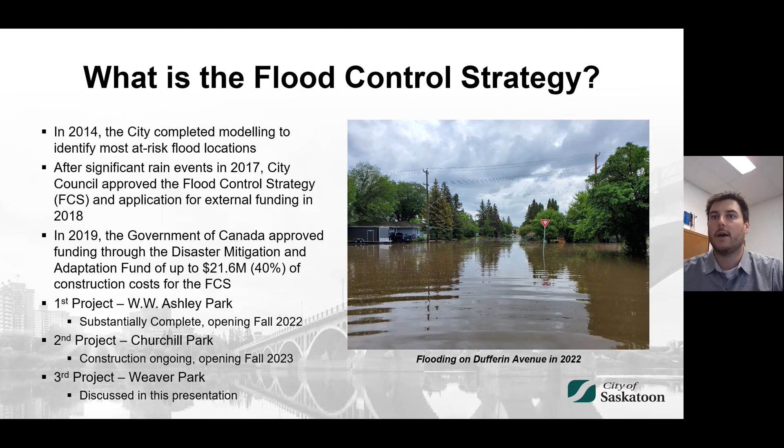Flooding in the Avalon neighborhood has been occurring for decades. The main reason for flooding in the area is due to the design standards that were in place at the time of neighborhood development, causing capacity issues of the storm sewer.

Design standards were changed in 1989, accounting for increased levels of runoff to be drained through the storm sewer infrastructure network. Neighborhoods are now developed with major system stormwater storage through wet and dry ponds, which were not used for stormwater management when this neighborhood was developed.

Administration presented the feasibility study and concept plan of the dry storm pond and upgraded stormwater infrastructure for Weaver Park to the City Council in April of 2022. The dry storm pond project was approved by Council and will help mitigate flooding for the previously mentioned intersections.

This is the current design concept plan for the dry pond in Weaver Park. The dry pond will be constructed on the north side of Weaver Park. The light green lines show the new storm sewer infrastructure that will be constructed along the east side of the park from Ruth Street East to the southeast corner of the dry pond, and also from the northwest corner of the pond to Eastlake Avenue.

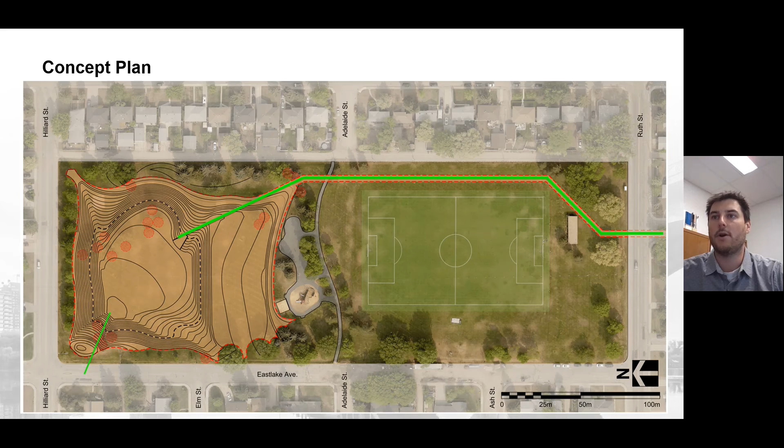The construction schedule will be finalized once the project contract has been tendered and awarded in the winter of 2022-2023. The project will be completed in 4 general phases.

The first phase will be pond excavation. The next phase will be storm sewer infrastructure construction and rear lane paving. The third phase will be landscape construction, and the final phase will be landscape maintenance.

The work zones for the project will include the north side of Weaver Park, which will be the site of the new dry pond. Additionally, storm sewer infrastructure upgrades will be constructed along segments of Cascade Street, Dufferin Avenue, Bute Street, Royal Avenue, and the south side of Weaver Park, connecting the intersections of Cascade Street and Dufferin Ave and Bute Street and Dufferin Ave to the new dry pond in Weaver Park.

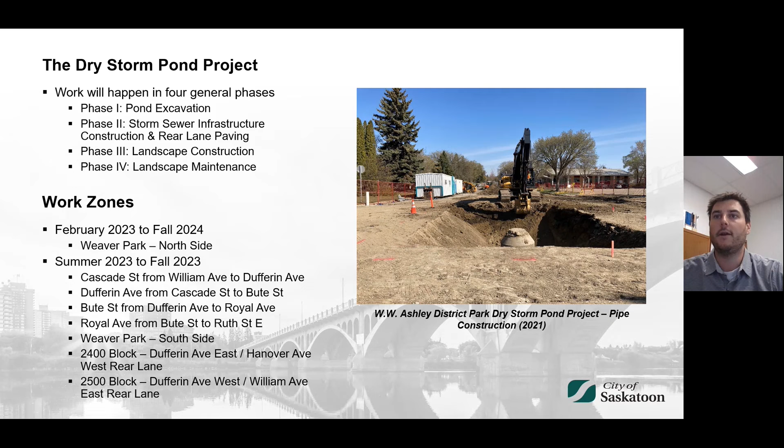2 segments of rear lanes in the 2400 block and 2500 block of Dufferin Avenue are also planned to be paved in this project. The preliminary work areas are shown on the next slide.

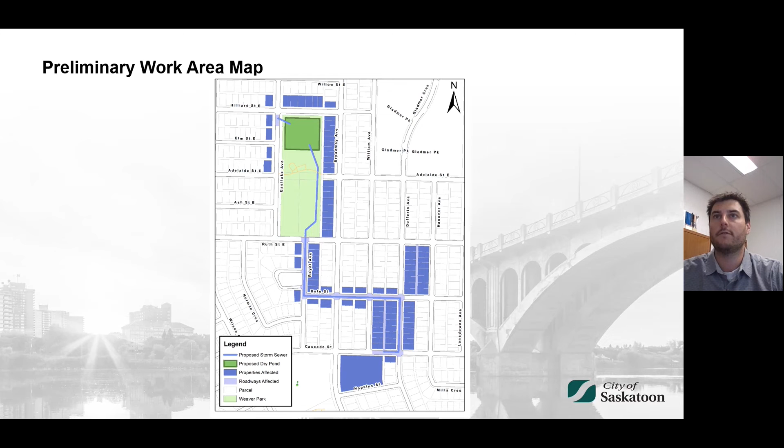This slide shows a preliminary construction map for the Weaver Park Dry Storm Pond project. This map shows the construction area for the work phases that are described in the next few slides.

The first phase will be the excavation of the dry storm pond. Construction will likely start around February 2023.

Winter excavation was previously completed for the W.W. Ashley District Park Dry Storm Pond and the Churchill Neighborhood Park Dry Storm Pond projects and went very well for both projects.

Some advantages of winter excavation include limiting the amount of construction traffic in summer months, managing dust conditions, and increasing the amount of landscape construction that can be completed in the regular construction season, which will decrease the amount of time required for landscape maintenance and sod establishment once the construction is complete.

The picture on this slide is the W.W. Ashley District Park Dry Storm Pond, which was excavated and completed in April 2021.

For comparison, the side slopes are more gradual for the dry pond at Weaver Park compared to the image of the W.W. Ashley dry pond.

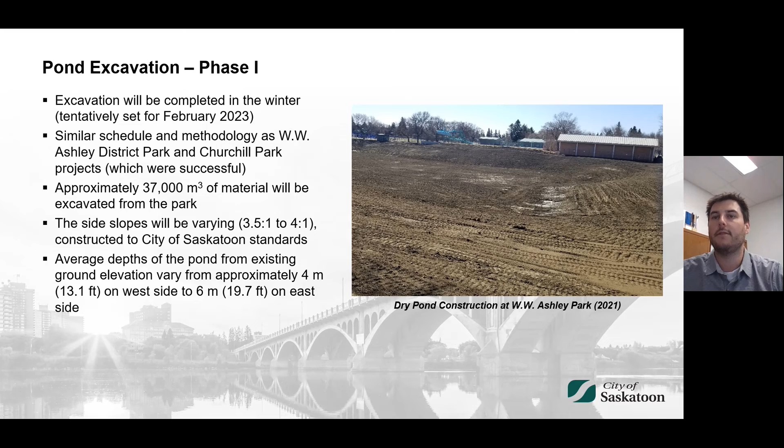The Weaver Park dry pond will have approximately 37,000 cubic meters of soil removed. The pond depth will range from 4 meters to 6 meters. As mentioned, the dry storm pond side slopes will be varying, though gradual, and designed to City of Saskatoon standards.

The next phase of the project will be the storm sewer infrastructure upgrades and rear lane paving, which will start in the regular construction season around May 2023.

The updated storm infrastructure will include new storm pipe segments under roadways and connecting to the new dry pond. The left image shows the storm pipe extending to the dry pond side slope at Churchill Park, which is similar to what is planned for the Weaver Park project.

The right image from the W.W. Ashley Park project shows an example of storm pipe installation under the roadway.

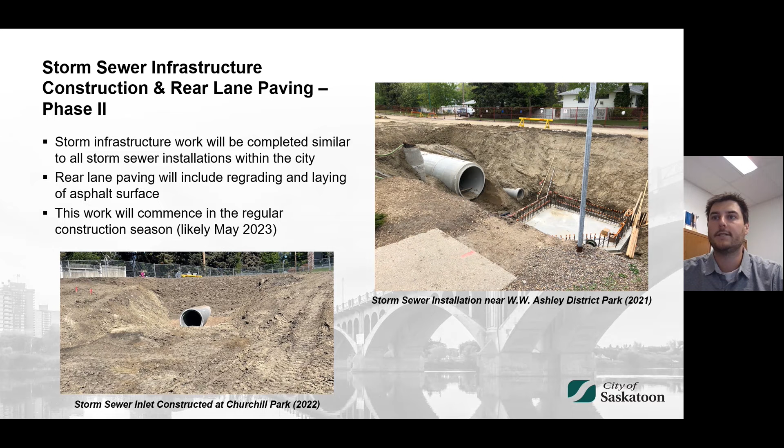The rear lane paving work will include regrading and laying asphalt on the 2 affected alleys. Timing of the rear lane paving and storm infrastructure construction under roadways will be coordinated so that access to properties is maintained to the extent possible throughout construction.

The third phase of the project will be the landscape construction. This will include sod, trees, irrigation, and other potential landscape features. Landscape construction will occur in the regular construction season of May to October 2023, adjacent to the storm sewer construction in the area.

The final phase of the project will be landscape maintenance, which will occur from approximately 1 year after phase 3 is complete.

The dry pond will be out of service in 2024 until final completion is granted. The exact date the dry pond will be open to the public is dependent on the construction progress and will be communicated to the public when known.

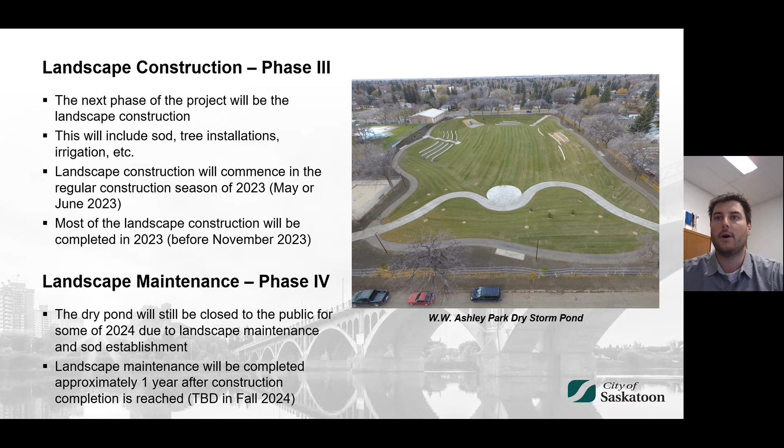An image of the landscaping completed at W.W. Ashley Dry Pond is shown on this slide for reference of an existing dry pond in the city.

This slide summarizes the 4 phases discussed in the previous slides. Exact dates and schedules will be communicated in 2023 once the project contract has been awarded, but the preliminary schedule for the project will be the following.

Phase 1, excavation will be completed in the winter from February to April 2023. Phase 2, storm sewer infrastructure upgrades and rear lane paving will be completed from May to September in the regular construction season of 2023.

Phase 3, landscape construction will occur between May to October in the regular construction season of 2023. Phase 4, landscape maintenance will be completed once construction has been completed. This duration of the landscape maintenance phase will depend on construction progress made in 2023, but will be approximately 1 year in length and will extend into 2024.

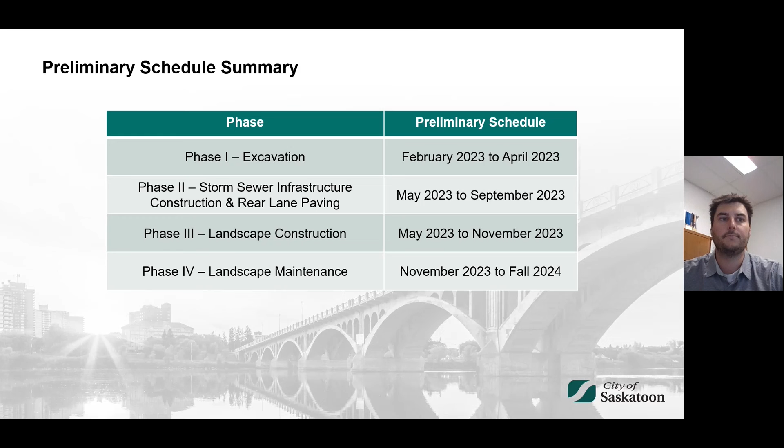We will now discuss what the project will look like. Some of the general details are the following. Number 1, the dry storm pond will be constructed in the north side of Weaver Park. Number 2, a smaller 65-meter by 25-meter multi-purpose field will be constructed between the pond and the playground area.

The bottom of the pond will not have a designated sports field, but will serve as an informal recreational area. Number 3, the east side of the pond will be suitable for winter toboggan use with a height of almost 6 meters between the street elevation and the pond bottom. Number 4, the design is being completed to limit the number of trees to be removed due to the dry pond construction. The perimeter trees along Hilliard Street East and the east side of the park will remain as is.

24 trees currently located along the west side and interior of the Weaver Park are planned to be removed for the dry pond and pipe construction. Replacement trees will be incorporated into the landscape design of the project. Number 5, the existing playground area and the large multi-purpose field in the south side will remain as is. Both areas are expected to remain open to the public throughout construction of this project, though there potentially may be some disruptions. Additionally, information regarding potential disruptions will be communicated to the public closer to construction.

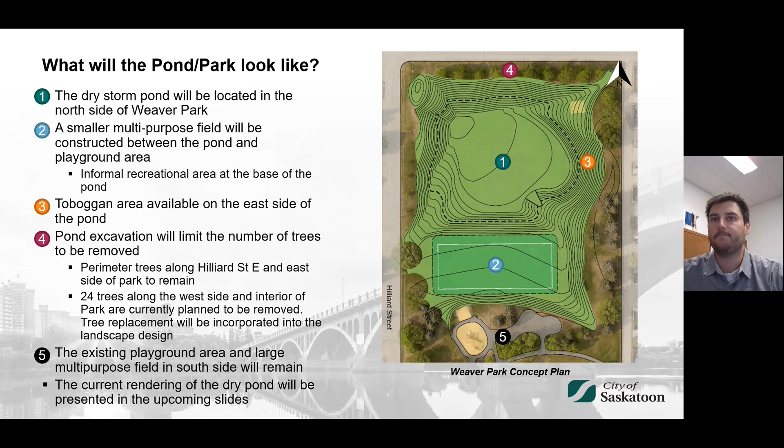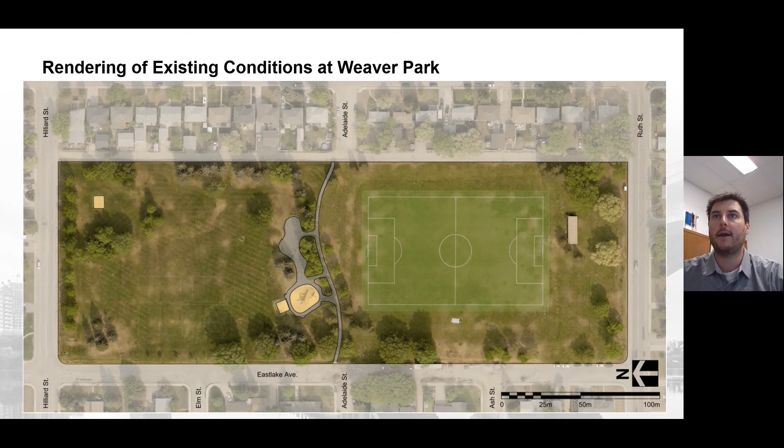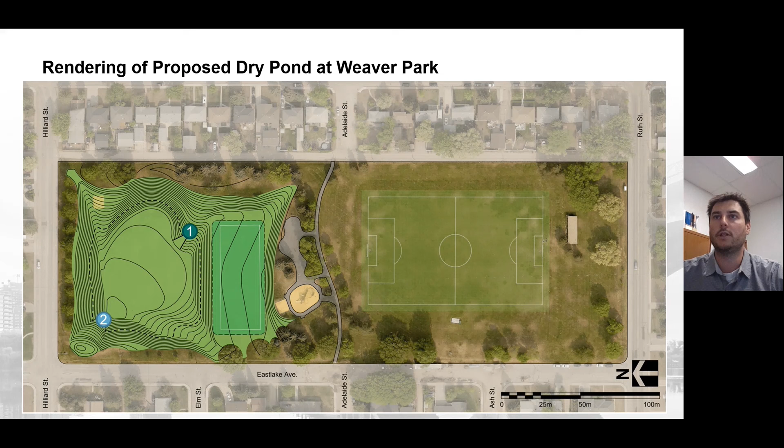In the next few slides, we will review current renderings of the dry storm pond design. This slide displays the existing conditions at Weaver Park. This image can be used as a reference to compare against the upcoming design renderings. This rendering shows the proposed design of the dry storm pond. On the design plan, the number 1 shows the location of the inlet structure that will fill the pond during rain events. The number 2 on the image shows the location of the outlet structure which will drain the pond. The design will include a multi-purpose field constructed between the pond and the playground structure.

This rendering shows what the pond would look like during and immediately after a significant rain event. If conditions allow it, the multi-purpose field between the pond and the playground could be used while the dry pond was in use for stormwater management. The final landscape design is still in progress, which will include new tree plantings and potentially other park amenities to be added to the park through this project.

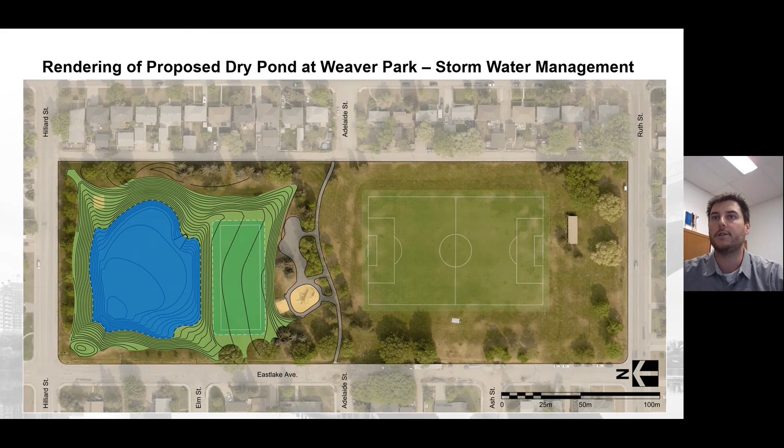I will now summarize how the pond will function. Stormwater will fill into the pond from the southeast inlet pipe and drain out of the pond from the northwest outlet pipe to be installed within the dry pond side slopes. At peak water level, the pond depth will be 2.1 meters or 6.9 feet. To reach the peak water level, the pond will fill in approximately 130 minutes during a significant rain event. It will take approximately 70 minutes to fill the pond to 90% capacity during a significant rain event.

When an intense rain starts, there will be a small lag time period of 25 minutes before stormwater starts entering the dry pond through the inlet pipe. After this significant rainstorm, the pond will drain in approximately 9 hours from full capacity. During smaller rain events, stormwater will enter the dry pond and then drain afterwards. The depth of water for a storm expected to occur every 2 years is 0.6 meters or 2 feet. The depth of water for a storm expected to occur every 5 years is 1.4 meters or 4.6 feet.

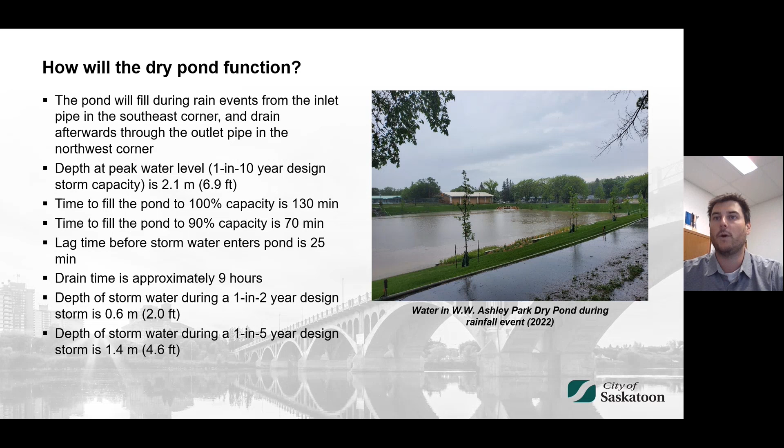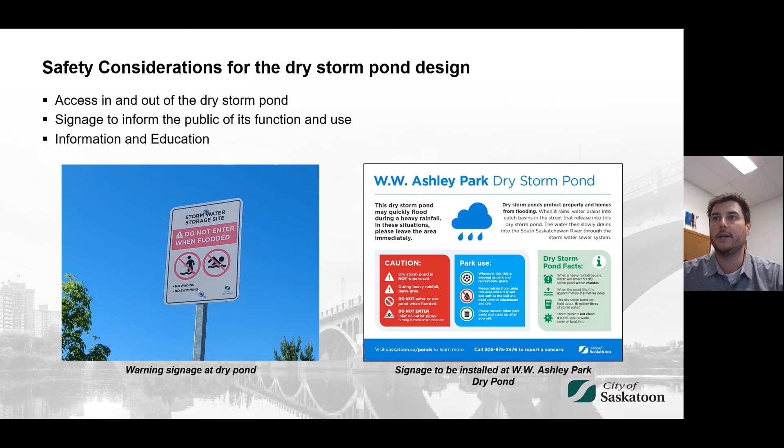Safety of the public and users of the Weaver Park Dry Pond is the highest priority of the design team. Administration is considering safe access in and out of the dry pond, signage to explain how it works, and potential ways to further educate the public and nearby residents on how the pond functions. Warning signs, shown on the left of this image, will be installed along the perimeter of the pond to warn the public to not enter the pond when it contains stormwater. Additionally, more detailed informational signs similar to the image on the right will be installed at select locations around the Weaver Park Dry Storm Pond after construction is complete.

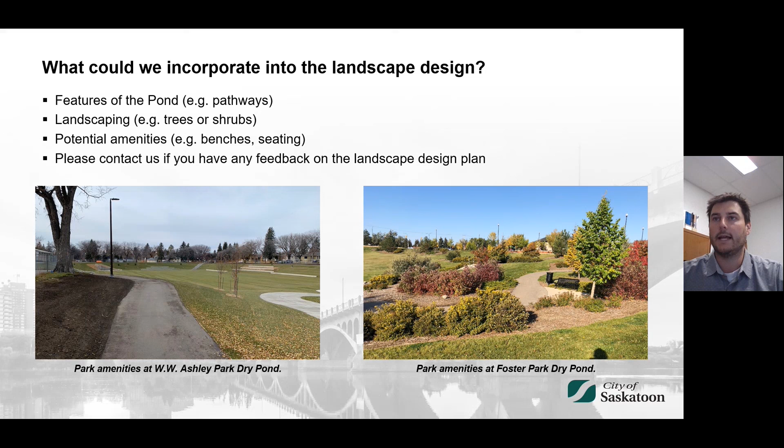If you would like to propose suggestions for the landscape design of this project, please contact us. Contact details are provided on the next slide. All feedback is subject to review by the design team and will only be executed if they fit into the overall landscape plan of the project and within budget. We are committed to providing the best overall product to the community while reducing the flood risk for many property owners in this area. We would appreciate landscape feedback from the community to potentially be incorporated into this project.

We hope that this presentation has answered some of the questions you may have had about the flood control strategy and the upcoming Weaver Park Dry Pond project. If not, or if you have any concerns, please contact us either by phone or email, and we will make sure to get the information to you.